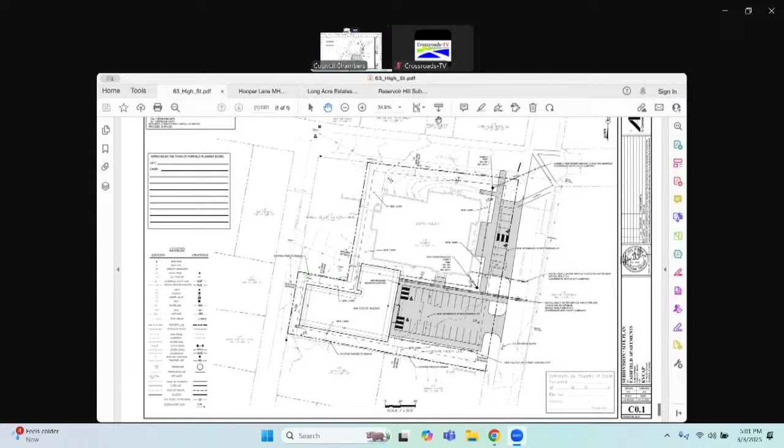a slightly larger building. So between the school building and the additional units they're building out back, there'll be 27 new apartment units, and those are varying from 1 to 3 bedrooms, so it'll be good for families. We've also got 34 parking spaces that we spoke about with the planning board last month, and we can discuss that a little bit more later.

But since last month, we've got additional information from the water and sewer departments here in town, and fire chief and police chief. And so we're just looking to gather any other comments from the public at this time, I guess.

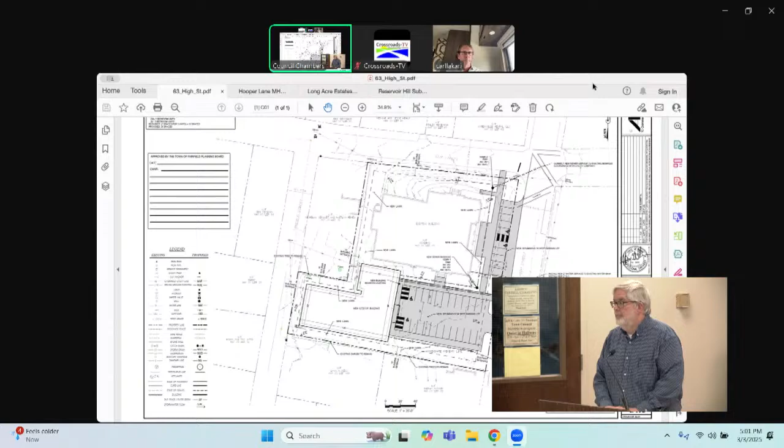Very good, thank you, Jeff. We are in public hearings, so anybody here from the public that wants to speak to this item on our agenda, let's go ahead.

Jeff, I don't mean to give you a hard time, but this is really stressing me. I see that. How about, is anybody zooming in on this issue? Nobody that I know of.

Okay, hearing no comments or no issues for the public hearing, at this time I'd like to close the public hearing. Thank you all for coming, that was great.

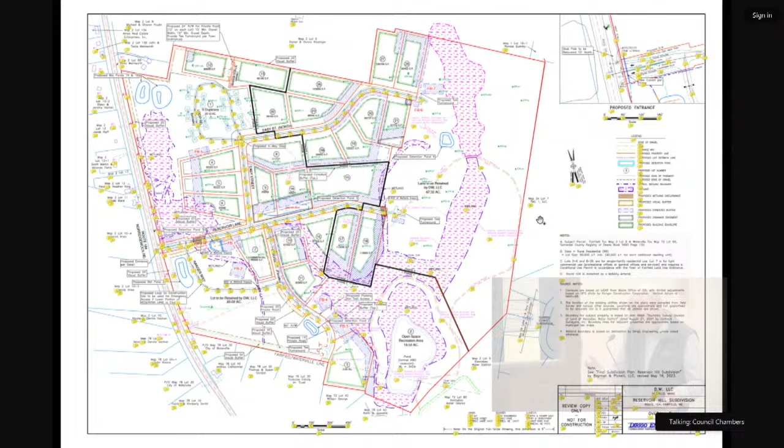Yes, and we can work with you to figure out the best way to do that. There wasn't really a good place to put that turnaround back within the lots, so we've pushed it out there, and we don't have anything defined on that large lot, but there's potential to eventually loop that around.

I think it would be beneficial to the town to have the T turnarounds incorporated into the public roads, whether the public road extends out into that proposed retained land. Sure, I think that's just cleaner than an easement. Yep, that's fine. And then it allows Public Works to make sure those T turnarounds are plowed sufficiently for emergency vehicles. Yep, that won't be a problem.

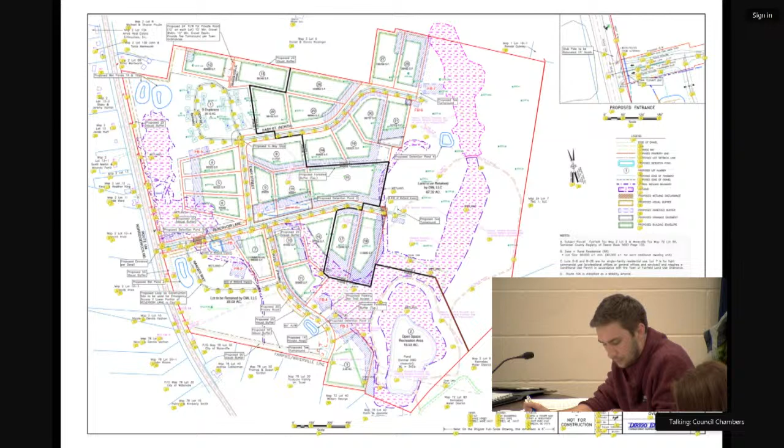And then you had mentioned that there'd be a dry hydrant here associated with a detention pond. Which detention pond is that? It'll be the very first one as you come off from Route 104, just as you come in on Reservoir Lane on the right-hand side. So adjacent, that little outline in blue is a proposed wet pond. Okay, is that going to be a surface water wet pond or a below-grade cistern tank? It'll be surface water, yeah.

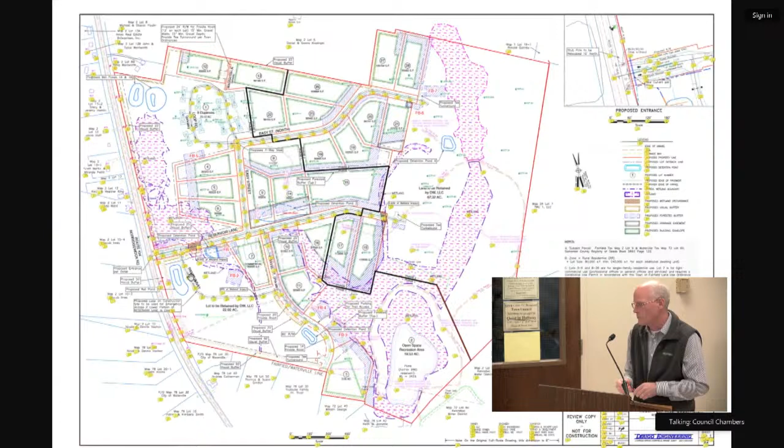It's kind of hard to tell on this layout, but we do actually have an 8-foot lane turnout for fire trucks to pull off the road to fill up there. So the dry hydrant will be right out at the shoulder of the road. We've got that detailed on other sheets on the plan we did for the construction site, so we can get that info to you if you like.

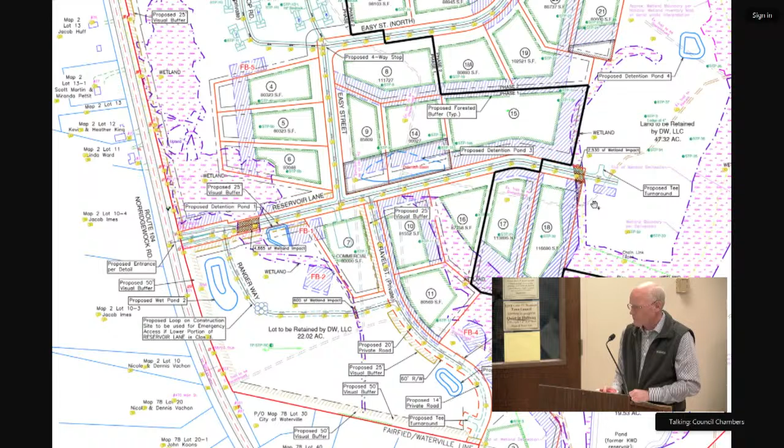At the end of Reservoir Lane, it looks like there's a wetland being crossed. It shows 2,530 square feet of wetland impact, and it looks like maybe there's a bridge or something there. Just a culvert. I'd have to look it up, but I think it was a 3-foot culvert, if I recall. And that would be within the public road, turned over to the town as part of the public roadway. Correct, yes.

Any other questions or comments from our board on this application?

I will say, I have some concerns, maybe not our purview, but about the town taking on more roadways to maintain. I do agree with Max that it would be easier without an easement to have that be inside of phase 2. I have some concerns about the town having more roadways to maintain, especially with a 3-foot culvert there, but I do like the way it's laid out. I agree the turnaround should be incorporated into it. I think that would be easier without the easement. It's just my 2 cents.

Anything else on this application? Nicole, do we take a vote on this one at this point? No, it's just sketch plan. He's taking feedback so he can bring you a formal application at a later date. Right now, you still have an active phase 1, an active bond on phase 1.

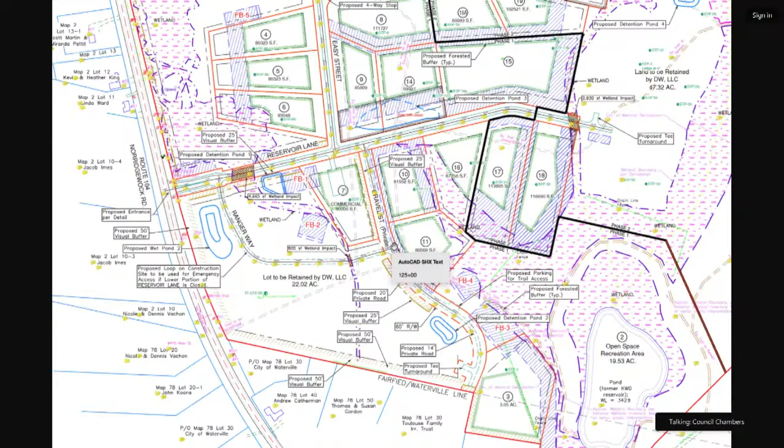I was thinking it might be nice to have an easement down the edge of lot 18, between the land retained by DW LLC and lot 18, to allow access if there wasn't good access from Gravel Street. But no, Gravel Street provides pretty decent access, and that's actually where, especially on the Phase 2 plan, you'll see the trail that goes down to the pond is right there, accessible, so that's the intent.

Yes, and I see on the Phase 2 plan where you have set out the parking area. Okay, right, yes, it is there. Very good, thank you, Randy.

Okay, next item. Randy Butler, P.E., Dirigo Engineering, representative for Brian Lorette of Long Acre Estates, on a pre-application sketch plan discussion for a proposed 28 dwelling lot subdivision, zoned rural residential, on 70 acres.

This one is out near Fairfield Center. Has the family farm traditionally been the Larrabees in that area? Larrabee and Wood, okay. So the land is currently owned by Anthony and Larissa Larrabee. The potential owner is Brian Lorette, who is with us tonight, doing business as Long Acre Estates.

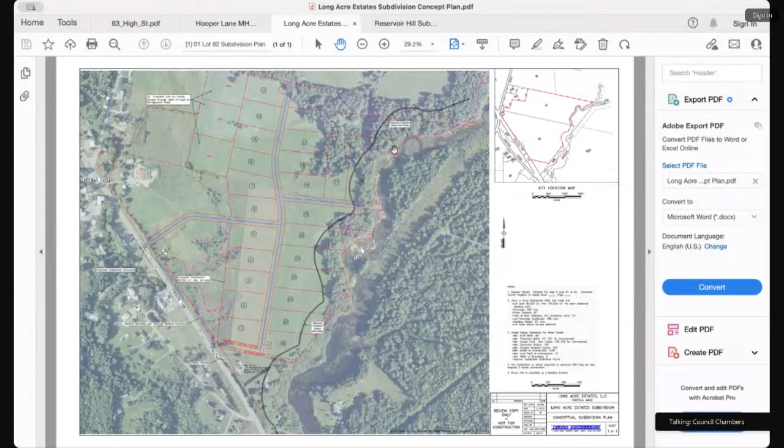The owner at this point intends to build spec houses, starting out at perhaps 1 or 2 homes per year. So the intent is to do this in phases to make it affordable. That might stretch over 5, 6, 7, or 8 years thereabouts, depending on how business goes.

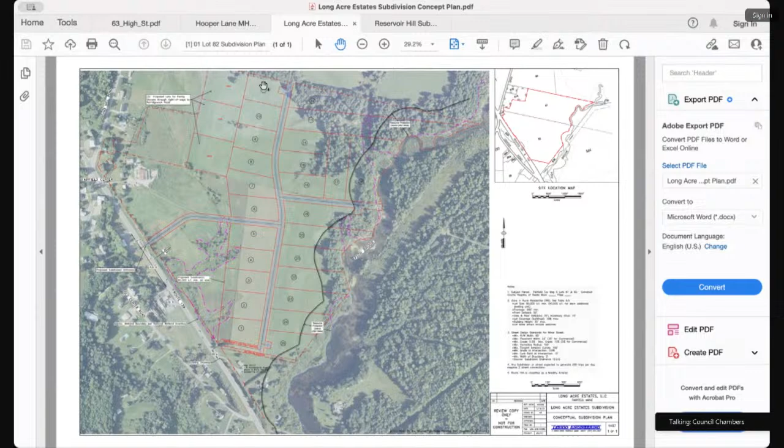Private water and sewer. We do understand this is in kind of the PFAS central out in that neighborhood, so we'll have to take some measures to do test wells and see exactly what we're up against out there. Very well prepared to provide filters if necessary.

The site is adjacent to Fisher Brook, so some of those lots will have shoreline zoning, resource protection district. A couple of the lots, I think, we'll have to revise. Nicole pointed out that we have them too long - there's a 5-to-1 ratio limit, I think, if I remember right. Lots 12 and 13, I think you've got the same plan that I do. Currently I have those shown longer than what your ordinance allows, so I'll modify that to get those into compliance.

Fire protection - we haven't had any communication with the fire chief yet, but we anticipate it'll be similar to Reservoir Hill out there. He required sprinklers in the homes. I don't think we have public water very close to that area, so no hydrants.

One of the things we'll have to look into: if we should exceed 20 lots, that's going to put us up over that 200 trip threshold. If you look at the highway manuals, they say slightly under 10 trips per lot, so 9.5 or something of that magnitude. So once we get much over 20 lots, 21 lots, that's going to kick us over that 200 trips per day threshold. So we'll have to consider how we provide a second means of entrance, if that's something you're anxious to have.

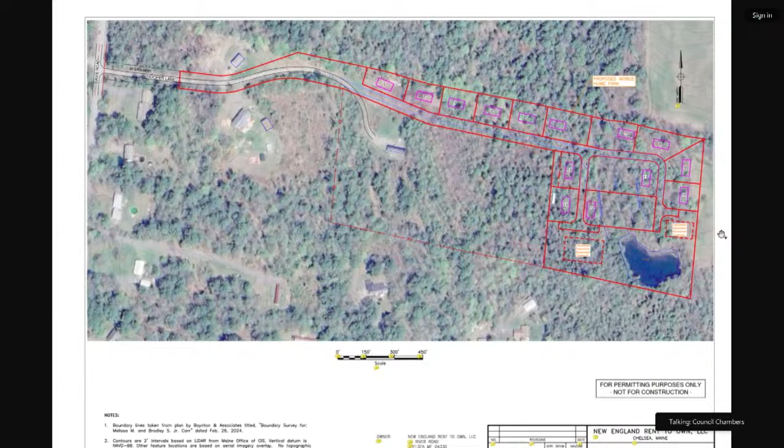I do show 75-foot setbacks from that stream, so the wetlands are mostly within that stream, but there's some off to the left there around lot 13 as well. So I wouldn't be surprised if we lose a couple of lots because of that.

So this whole lot essentially is kind of a big L-shaped lot, or shaped like a big J, if you will, coming off from Davis Road, Hooper Lane. The first few hundred feet is across an easement, as you can see off to the left there, coming off Davis Road. You'll notice the E/L line. That simply means easement limit.

So there's a 60-foot easement coming off from there, and then a good two-thirds of the road is owned by the developer, New England Rent to Own. Don't be misled by the name of the company. They've been in business for a number of years. That's the name of the company.

That's not necessarily the model that they'll use here, as far as they'll be doing it in a traditional mobile home fashion, where typically the developer owns the lots, the tenant owns the homes and leases the space, is pretty much the plan here. We will have to go with centralized subsurface wastewater treatment systems here.

The town does not have a mobile home ordinance per se, so what Nicole instructed me on is essentially use the state's model, and that requires a 12,000 square foot lot, which is a pretty healthy lot for a mobile home site. A lot of places, like Waterville, for example, is 5,000 square feet. So these are fairly spacious.

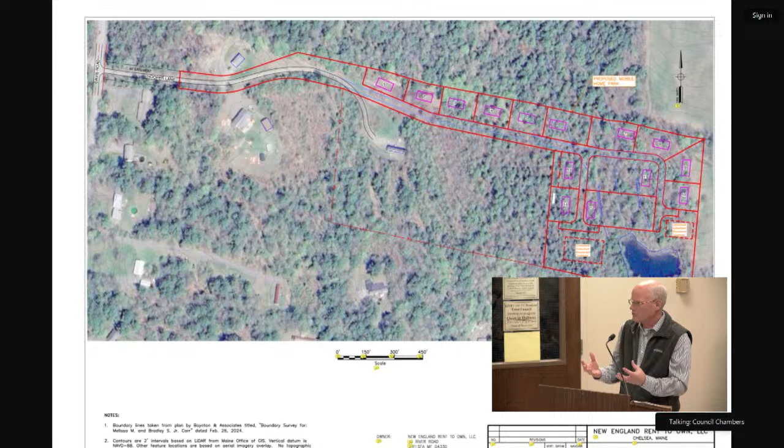Another requirement, the state doesn't require it, but the manufactured housing rules require that if you're on a subsurface wastewater system, your lots don't necessarily need to be 20,000 square feet, but you've got to have enough aggregate throughout your entire park to accommodate 20,000 square feet. We do have that here with what we've got. Again, I've got to back up and check the wetlands - if it doesn't work out right, we could end up losing a couple of lots due to that.

So that's the intent. Generally, the lay of the land, it's from lot 1, which is up there on the left. That's pretty flat up in that area, and then as you get down to lots 3, 4, 5, it kind of pitches to the southeast, generally speaking, toward the pond at about maybe a 4 or 5% slope. So it's a pretty good site for development of this nature.

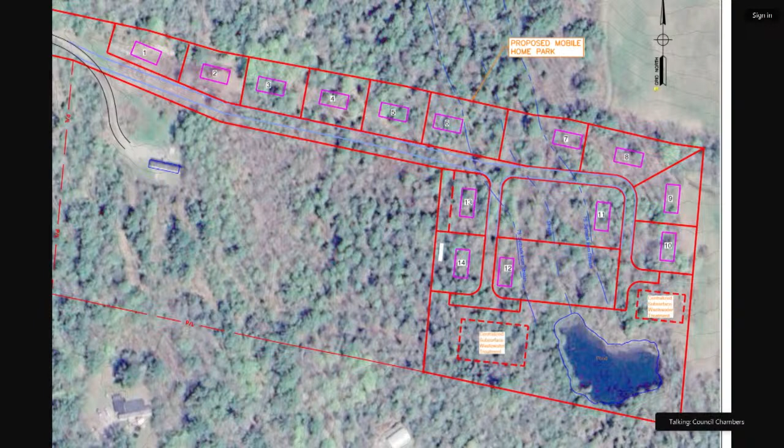Congregate septics, private wells as well? Yes, correct. Well, actually, sorry, on this one it would be probably a community well would be the plan here. Okay. And that would have to be, anything over 10 lots would have to go through DHS. Okay.

Anything from our board on this item? It looks like on the property there is, I guess, maybe an existing home. Yes, that's my home. Yeah, that's a separate piece of property. Oh, that is a separate piece of property? Yeah, that's a mobile home there, yeah.

So this 10-acre piece is, you've kind of got that square down to the right, and then just that 100-foot wide strip going up towards Davis Road. That's the piece that the mobile home park is on, and then this other property is owned by Mr. Salter, is that correct? Yes.

Does Mr. Salters' property, as well as maybe a house to the north of the roadway, closer to Davis Road? Yes, as you come in off Davis Road, there are I guess 3 homes - and I might be wrong, I'm not sure if there's one on the left.

Do those 3 properties have easement access through this property that's proposed for development? They do, at least to a section of the road. I haven't read their deeds, but they've got access to the road, yes.

I'd want to make sure before we further complicate this area. As far as maintenance, there's no maintenance done by the town, no plowing, none of that - we have to do that ourselves. Hooper Lane is private, Nicole? It is private, yes.

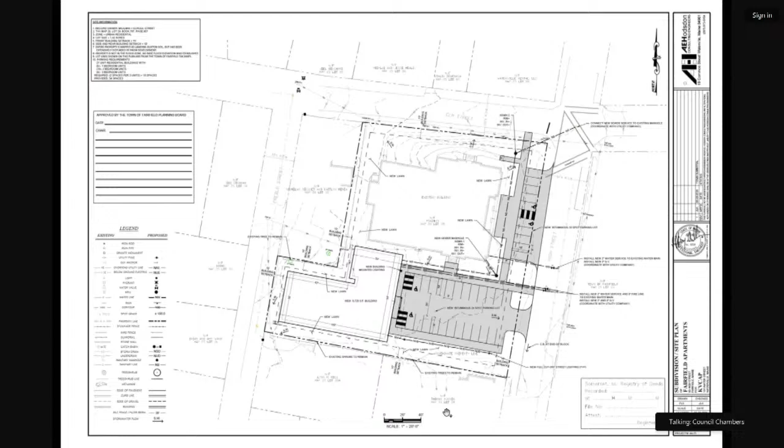The nearest catch basin on High Street is down at the next intersection, and I note that it's curbed all the way down in Mr. Munson's driveway. I'm not sure how the water goes by that now, but if it does not, we could put in a small, essentially a speed bump that would keep the water in the road and keep it going down to the catch basin at Kelly Street. My plan doesn't go quite far enough.

Could a catch basin be installed at the entrance to High Street with a new storm drain running down to that catch basin at the corner of Kelly Street? I'm just concerned that that's a lot of impervious area to be dumping into a town road.

Well, actually, we're reducing the impervious area some up in front of the school building because we've reduced the amount of parking spaces there. Right now, we've got double-decker parking going right from the road all the way to the face of the building. So we're putting in some new grass there, which will reduce the impervious area some. There is an increase, so if it were necessary, we could put in a catch basin there and go down the right-of-way, but that would be quite expensive to do, and I don't know as there is a need for it.

The increase in flow here from this 24-space parking lot is going to take a while to go along the curb, but that appears to be what has been done in the past for some time. So that's ultimately your decision, but I believe it's adequate without it.

Around the existing school building, the water's going to keep going off as it is anyway. There's no change there, except behind the school on the west side, there's a gravel driveway we're proposing to replace with lawn, which would decrease the impervious area. That area drains to a catch basin at the corner of Preble and Elm Street, so that would decrease the flow there.

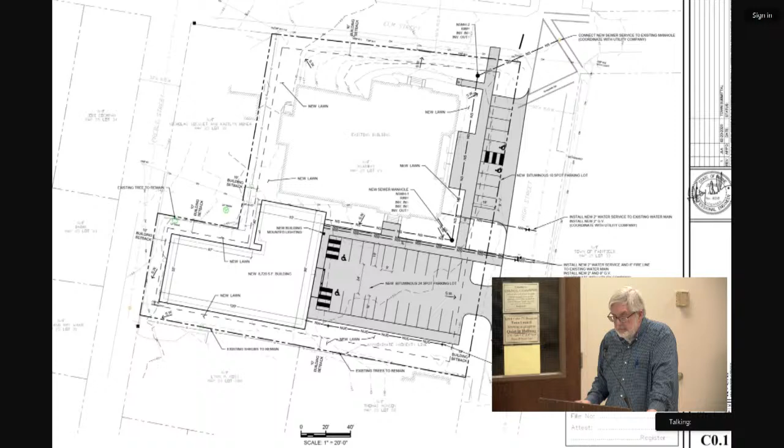I'm very concerned about the amount of stormwater that's going to be dumped into High Street. I understand that at the existing parking area some pavement is being reduced, but we're adding a lot of pavement where the existing playground is. To assume, with just assumptions, that water won't get into the traveled portion of High Street is risky. And even if it doesn't, there's going to be a lot of ice buildup there for people coming in and out of this parking lot.

I think it's a sound development move to install a catch basin at the entrance to that new parking area and run a new storm drain down to the existing storm drain infrastructure. It just eliminates risk, as opposed to crossing our fingers and waiting for an accident before the town has to shoulder the cost of installing a catch basin there.

What is the run to Kelly Street? Do you know? It's a couple hundred feet.

Yes, go ahead. I apologize for intruding. No problem. I'm Ira Butter. Could you come to the microphone? Tom, come up. I'm Ira Butter.